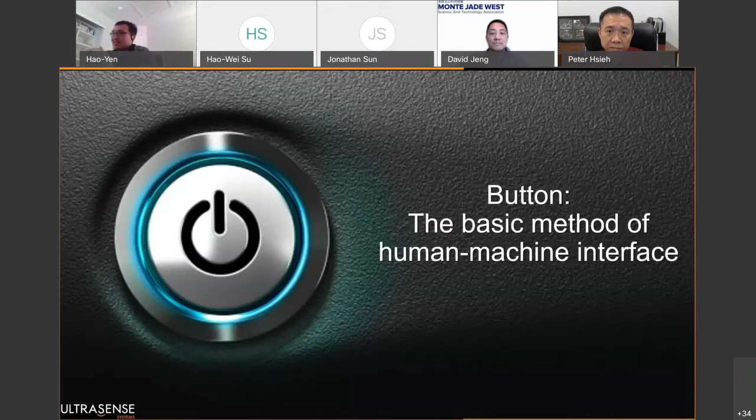Before that, it was an age of mostly BlackBerry-type traditional phones. People wanted to add more functionality into it, more human-machine interface. Literally, people tried to cram the whole keyboard onto the phone, making the whole phone so bulky - until the iPhone came and introduced touch panel technology.

This is, of course, something we're working on at the very front line of technology development. People are not satisfied with just replacing all the buttons with a touch panel. They also want to remove the side buttons on the phone - the volume up, down key, and the mute key.

Why is that? When we interact with lots of companies, especially mobile companies, there's a very interesting perspective - the most important thing for them in replacing the mechanical button is beauty. They want to make their phone look different from others. They want to make the phone completely symmetric, so the appearance of the phone is the thing they care about the most.

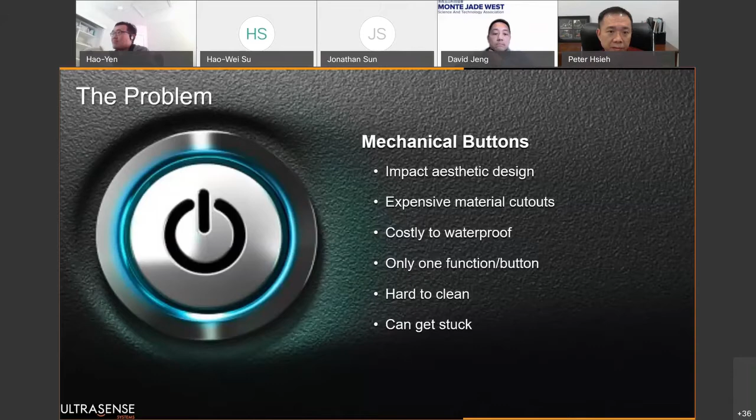We place this chip on the back side of any material, and it can virtually penetrate to almost any thickness in the current design for any kind of consumer electronics. Then it will translate the top side of the stack into a user interface. I emphasize user interface because it's not only a mechanical button - it can provide a lot more functions than that.

Here's a brief company overview before I jump into the technology perspective. Our company was founded in April 2018. A little bit of story here.

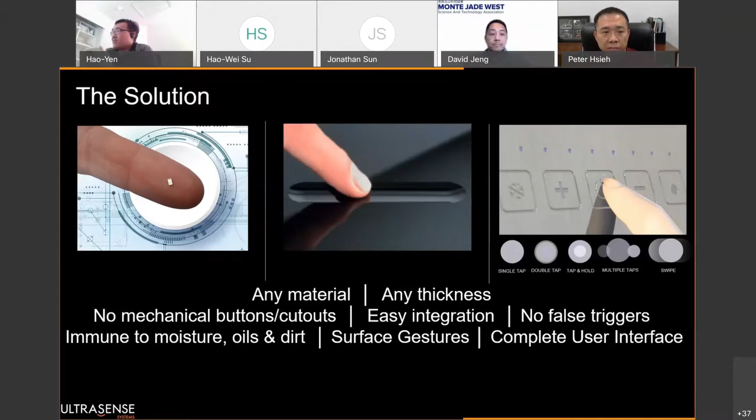My former employer was a company called InvenSense, which was about a 1,000 people company. They focused on making MEMS sensors, especially the gyroscope sensor. They used to be the world's largest gyroscope supplier when they had the POs from Apple. But in the industry, I think lots of people call them 'poison apple', because if they have you, then you go IPO; if they abandon you, then you crash.

But InvenSense wasn't that bad. It was actually pretty successful, went through IPO, and the company grew pretty large. But later on in 2017, it got acquired by a company called TDK, which is a Japanese company. By the time I was at InvenSense, our CEO and our previous management team jumped out.

They also grabbed me, and then built this company based on some of the research I did back in UC Berkeley. Our office is in San Jose as headquarters, and we do have sites in Shanghai, Seoul, and Hsinchu. Hsinchu is actually the largest site, and handles almost all the production facility and production issues.

Our investors - I especially want to emphasize our company is backed by a good amount of investors, including Bosch and Sony, which are the two most shining names. We also have lots of patents going on. You can search our company's name and already find 4 issued US patents, with more to come.

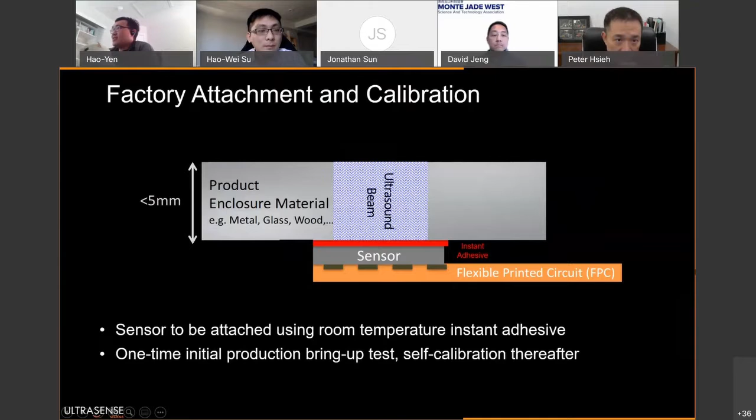So with that, our sensor is now being used in a variety of domains. For mobile, we mainly use it to replace the volume up-down key. There's a customer working with us to implement a selfie button on the back side of the phone. And as gaming phones become more and more popular, people would like to implement two extra buttons on the side of the phone to mimic a joystick. These are the three directions customers in mobile are working on with us.

There are other, newer technologies using this as well. We are working with IoT and wearable customers, including smartwatches, wireless earbuds, and AR glasses. These solutions especially like our approach because the whole design needs to be really small, so they can't afford a big sensor. They need something tiny because space is very limited. But they still need some kind of human-machine interface to execute commands or interact with the device, and they don't even have space, like in AR glasses, for a mechanical button. That's the reason they come to talk to us.

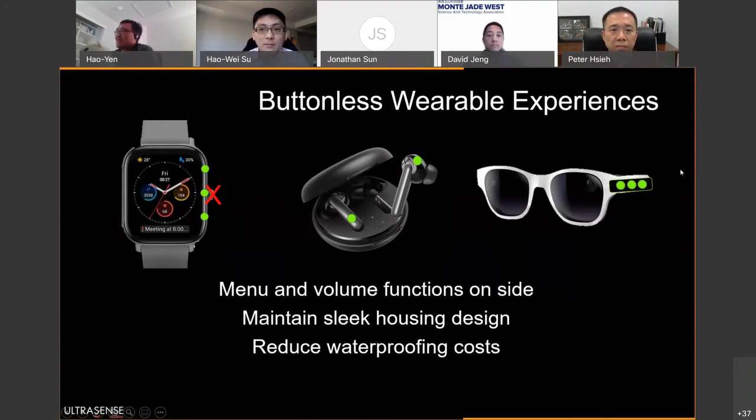On the appliance side, the story is quite different. The main reason they want to work with us is they want to make it completely waterproof, and also add features beyond a simple mechanical 0-1 press. They can also save a lot of cost by not cutting holes through stainless steel, and directly using our sensor as a touch interface.

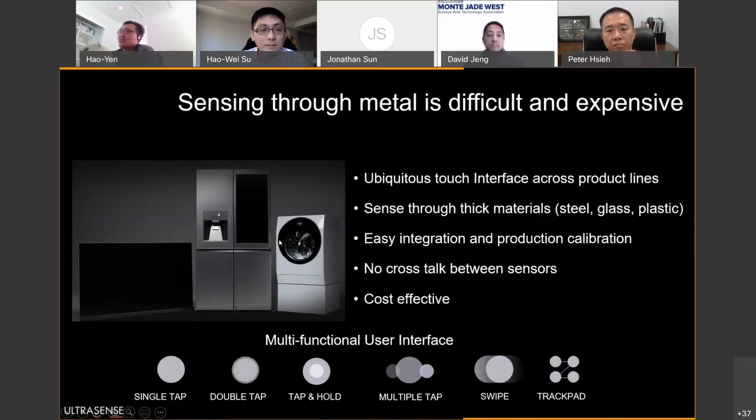With limited time, I'll show two more videos. This is wood. As I mentioned, ultrasound is not material-specific; you can literally penetrate through almost any material you can think of.

If you touch anywhere outside the material, it's not going to work. You need to touch the location where you laminate our sensor in order for it to trigger. So it's not something like a spring you just attach to the bottom side of the material. Otherwise, your whole material will trigger, and then it's not really categorized as a button. The button needs to trigger only the location when you press it.

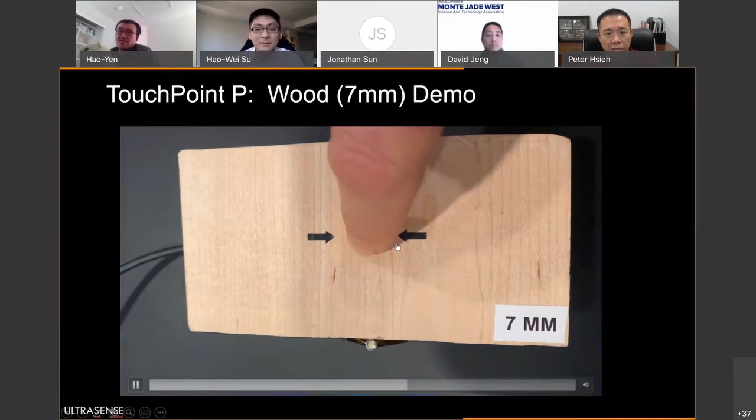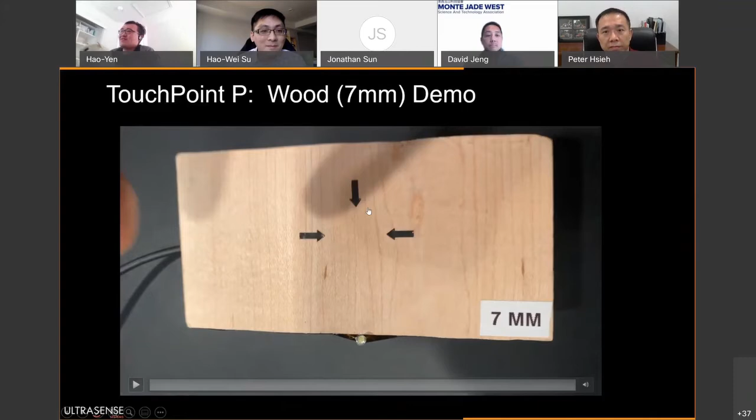I'll show one more video. This is kind of the final page, but this is just for fun. Nobody really needs this application, but here is a 2 centimeter aluminum box. Same story, it's not a spring under the metal box. You need to press the button location in order to make it work. This video shows there is almost no limit to our technology in terms of material thickness and material properties.

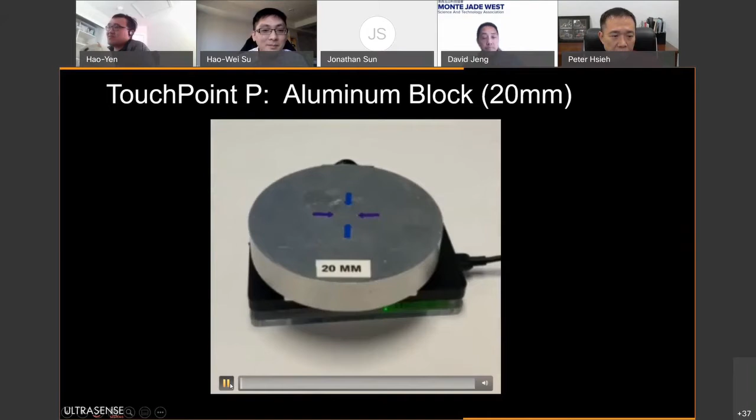Awesome, Hsieh, thank you. This is awesome technology. I really wish I don't need to clean the keyboard anymore in the future. Yeah, that comment really comes from one of our customers.

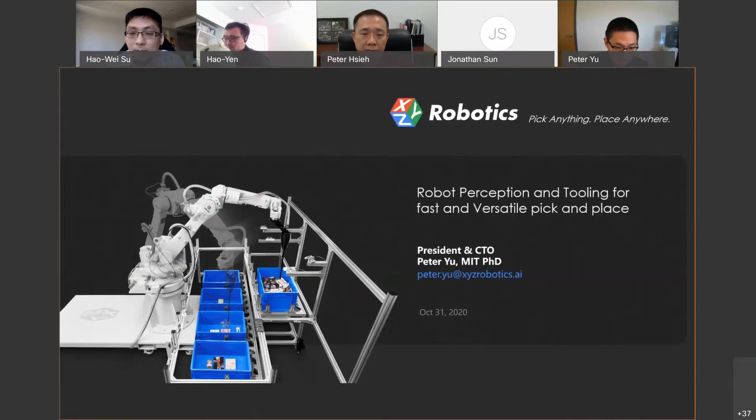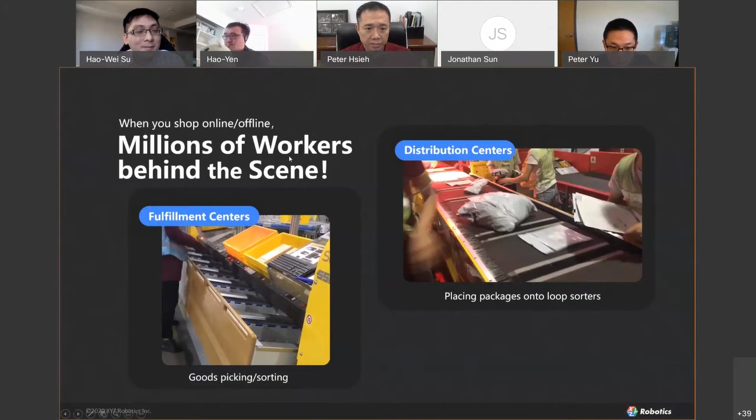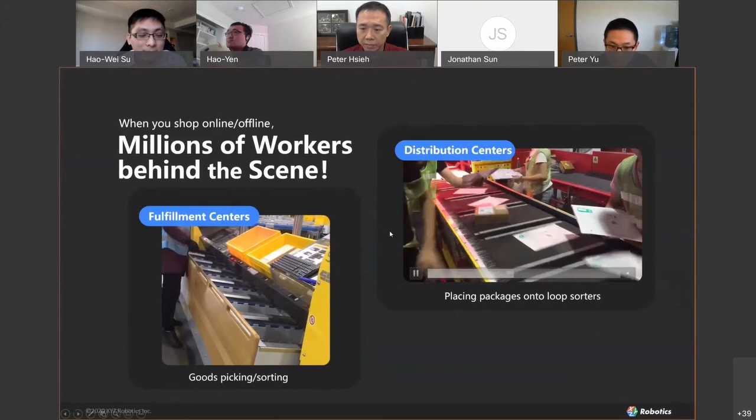or sending packages around. After you do online shopping, there are millions of workers behind the scenes to get your goods picked in an Amazon warehouse, or after they pick your item and ship it, it goes to a distribution center like UPS or FedEx. They have lots of people doing this conveyor belt induction. So the challenges in logistics are rising labor costs and high turnover rate. Humans will make mistakes because sometimes it's a sorting process, and after 8 hours of standing work, they get very tired.

So that's what we are trying to do, trying to automate the pick and place. In logistics, it's called piece picking, picking things one by one.

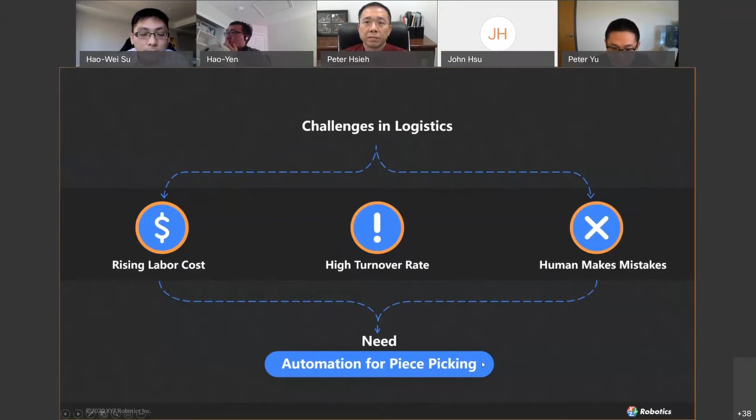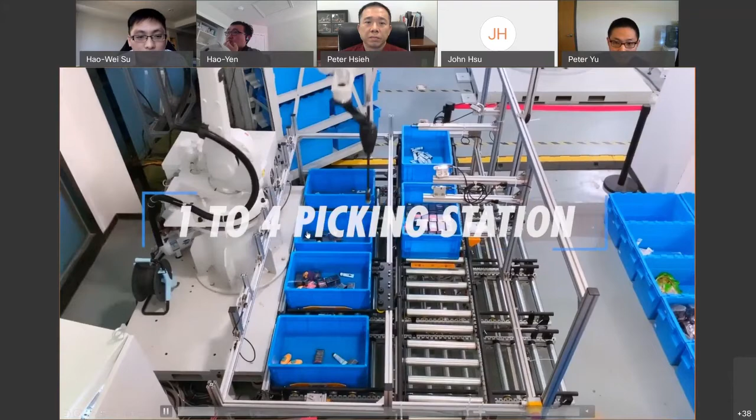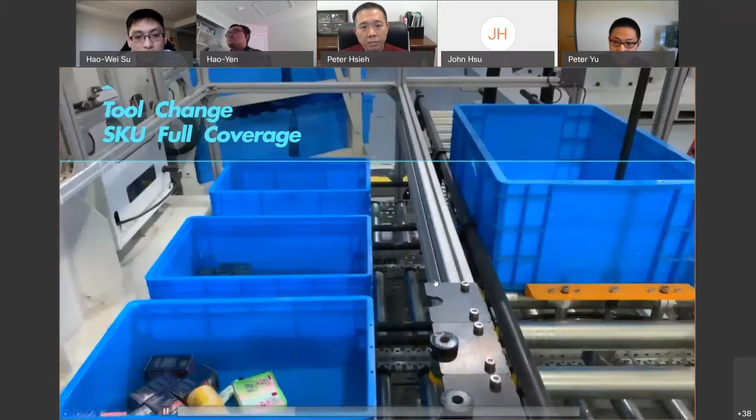So here I'll show you a video of how our system works. This is called 1 to 4, from 1 tote to 4 totes. Usually this tote coming in has homogeneous items, like the same item. Here we have a tool change that can swap to different sizes of suction cups, which can help pick up many different kinds of items, including some challenging reflective items. Here it shows the toppling, and here it shows the gentle placing.

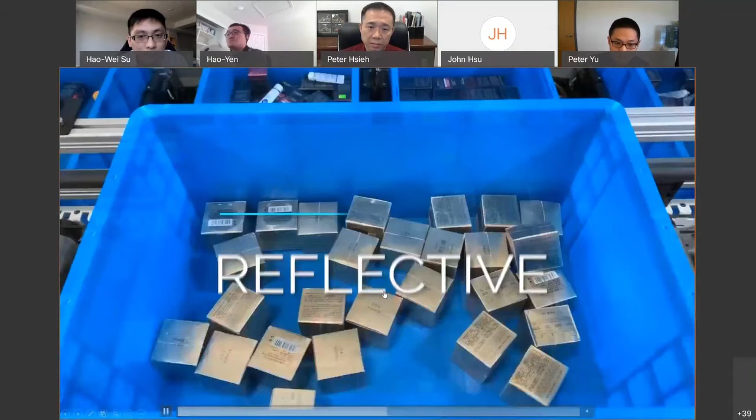Okay, I hope this gives you a quick overview of what we are doing. So there are some key metrics for automating piece picking.

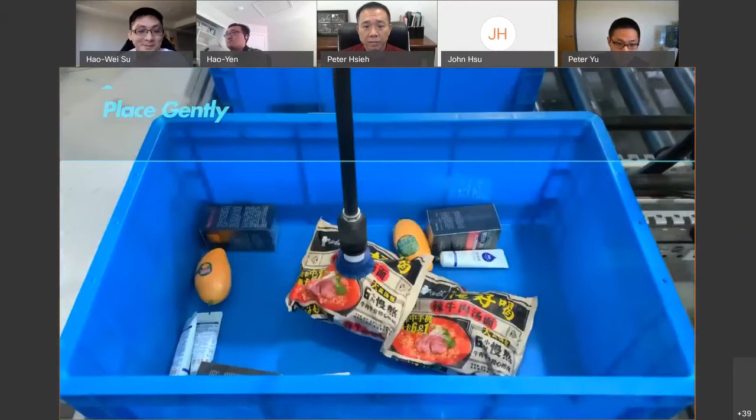There's rate, how fast you can do it. Usually the customer will like the robot to perform as fast as a human, or even exceed human performance. And range is like the different weight, different size, and different material of the item that the robot needs to be picked up and placed.

And reliability—unlike lab work, which only does it for demo or for video shooting, here we really want the robot to work like 24/7 without much human intervention. And there is cost, because it's kind of like replacing labor, and you want a good price, because the robot system is also kind of expensive, so we need to reduce the cost so that it makes sense to replace the human.

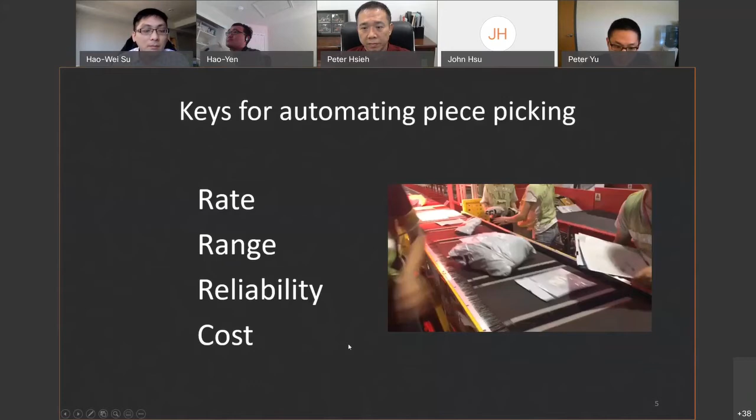So our solution has one key thing called our 3D AI vision processor, which is kind of the eyes of the robot. And then there's the hand of the robot, which is the XYZ tooling component. By combining these, we form turnkey solutions.

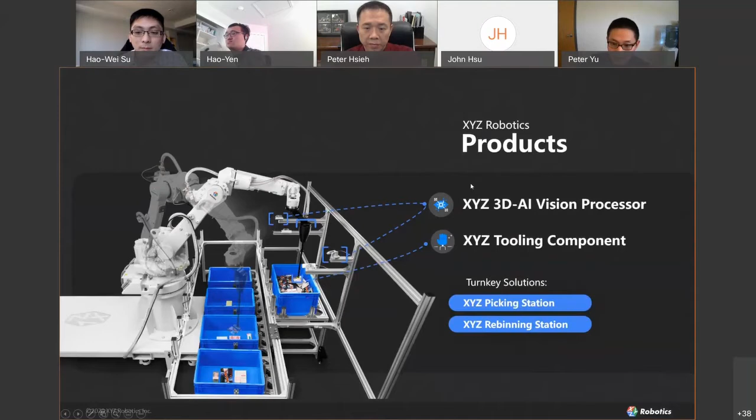And it's pretty fast, 0.1 seconds for VGA mode. This is important for achieving the rate that the customer wants.

So we can pick a very wide variety of items. Again, we don't train on individual items—we let humans instill the picking capability into the robot by doing labeling and training, so that in the end the robot knows how to pick it up and humans don't need to do it.

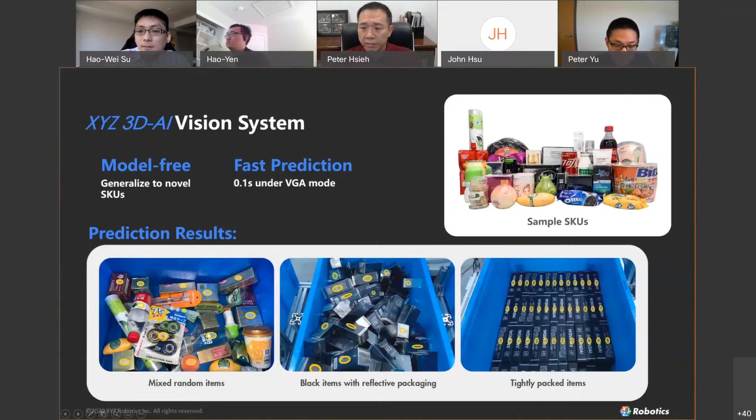On the other hand is the tooling, meaning what is attached to the robot. This is our typical end of arm tooling attached to the robot. Here's a key feature: compliance. When it hits the item, it will automatically retract passively, so it won't collide with the item or damage it.

And then there's a tool changer, something like this that helps you swap between different suction cups or even a gripper. I'll claim that as far as we know, we have the fastest tool changer in the world—it's 0.5 seconds per change.

Here I'd like to show you a video of what's going on for the tool changing. Here is the tool changing dock, with the suction cup and the gripper. Typically we like to use suction cups, but there are items, say thin or mesh items, which really need the gripper to grab the item.

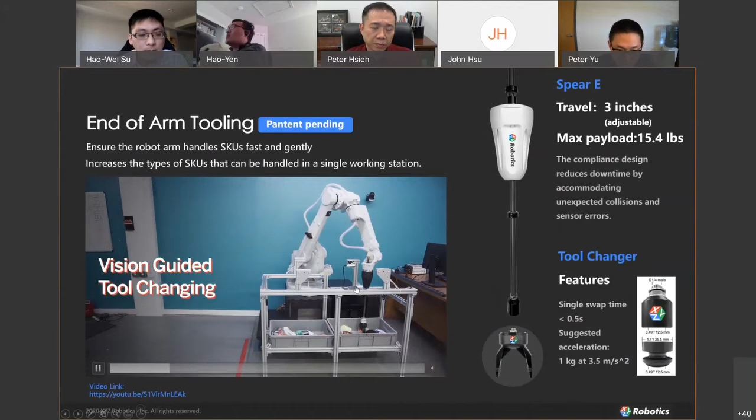It's very low profile, not big, so it can get into a clutter scenario pretty easily. Something like this bath sponge or this tool needs to use the gripper.

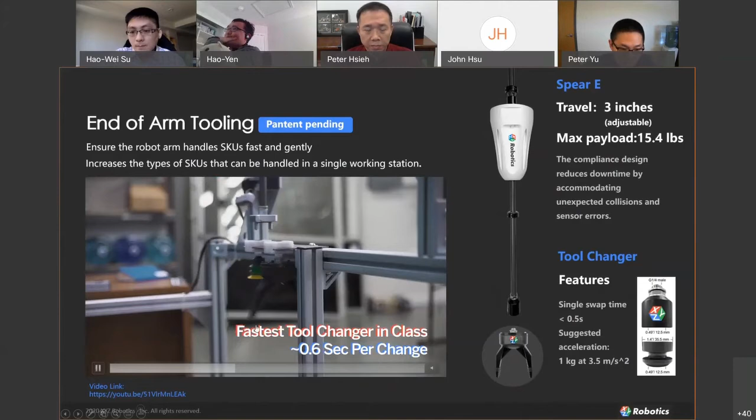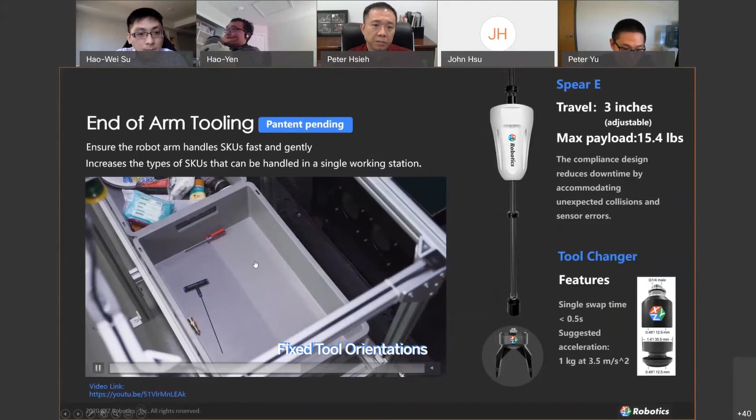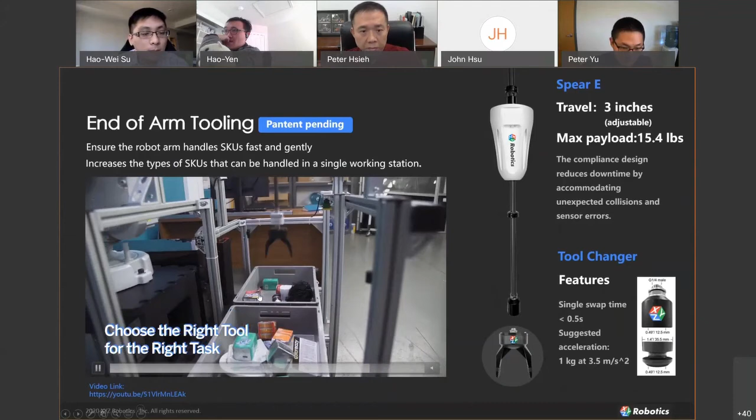So what we want to say is for the robot to increase its range, it really needs to use the right tool for the right job. We have the mechanical capability here, and on the software AI side, we also need to give the robot the intelligence of knowing which object should use which tool.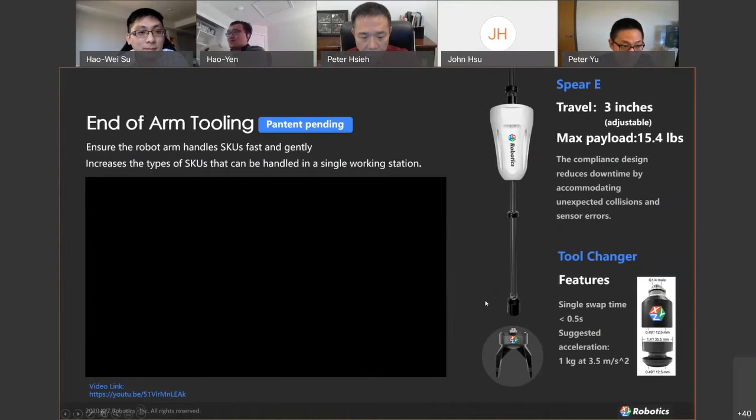Here is a close look at a gripper that we developed in-house. It's a soft gripper, and it helps with picking items without damaging them. Sometimes there will be an unexpected collision, and the soft gripper is good at adapting to the scenario.

The design of it is driven by vacuum, so it can easily swap between the vacuum and the suction cup, just using the same tubing that we have.

Here I'll show you many other scenarios that we have deployed. The first one is palletizing and depalletizing, which is a larger scale, and it's a real hard need because usually these boxes are pretty heavy.

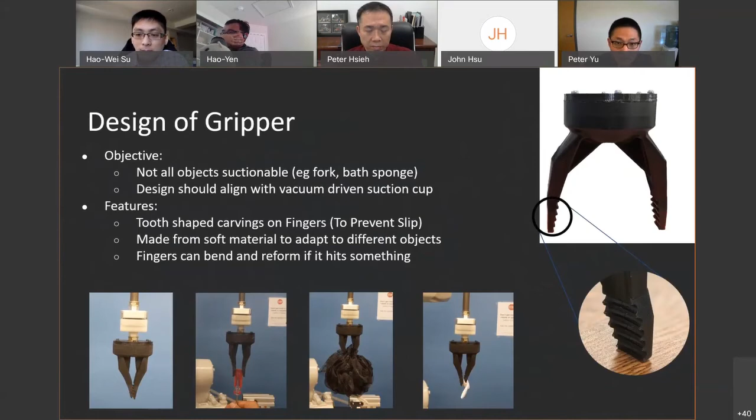The second one is picking Legos. Lego is pretty challenging to pick because it's an irregular shape, but we were able to develop our tooling and vision system to pick it.

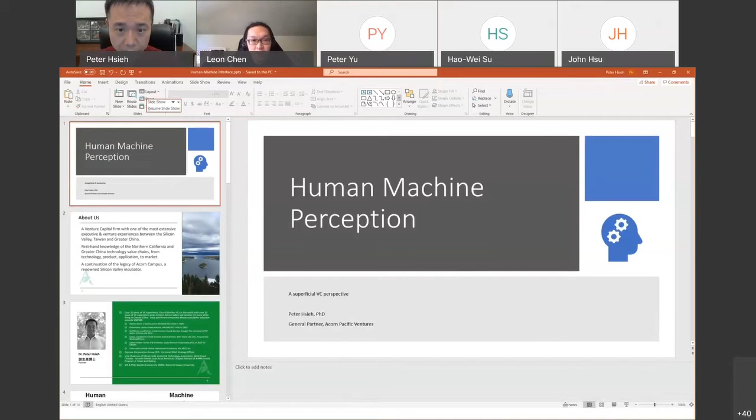Okay, yes, great. So thank you, everyone. I just want to say how grateful and honored I am to be able to speak at this venue. I am actually a son-in-law of the New Haven area, because my wife, who is also Taiwanese, got her master's degree from University of New Haven in healthcare management. So it's a wonderful experience to come back here, and I miss all the lobsters I can have over there.

Today's topic took me a while to understand, and I decided to approach it from a different angle. The topic is merging human-machine perception, rather than merging human-machine interface. When I was writing the speech yesterday, I found the human-machine interface market worldwide is currently around $6 billion, growing only about 8% to 10% a year over the next several years. So from a VC's perspective, especially with so many people tackling human-machine interface, $5 to $6 billion with so many startup companies is actually a little too small.

So I looked at the topic again and found out the event host here in New England decided to call the topic merging human-machine perception. So perception is definitely different from interface. I did some further research and found out this.

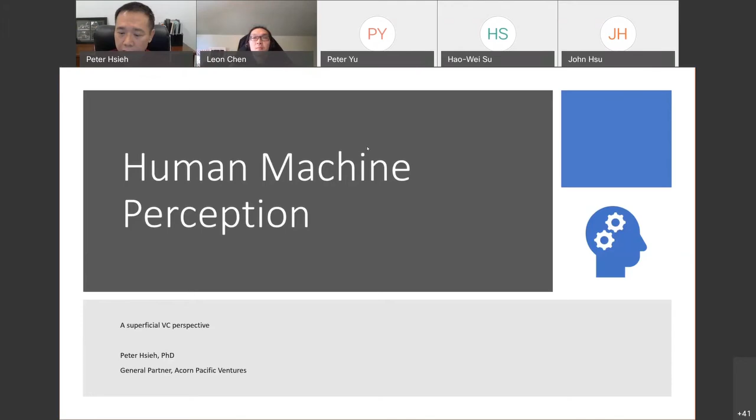A brief about Acorn Pacific: we are a venture capital firm with a lot of executive and venture capital experience, both here in Silicon Valley, Taiwan, and Greater China. We started around 1999 with a bunch of very successful Taiwanese entrepreneurs here in Silicon Valley. Companies they have either founded or invested in, cumulatively, exceed about $200 billion. So it's quite a legacy from the old Acorn campus area.

One thing I think in the East Coast you also have is Ranch 99, which was also created by several of the founders of Acorn previously.

Acorn Pacific continues the legacy of Acorn Campus, so we're the new generation. Myself, our chairman has already introduced myself, so I'll skip this slide.

This talks a little bit about how people see it, and this is a very old slide that you can see everywhere. To the left is human, to the right is machine. And the horizontal arrows in between is the interaction and the interface.

But what I think the topic today is related to perception, which is on the human side on the upper left corner, cognition, how people perceive and understand. On the right-hand side is how the machine utilizes the data to understand. On the upper right side is called processing.

Interface is easier to be quantified, but cognition and processing is a lot of gray zone. For example, if a girl approaches one of you, or a boy approaches you for your telephone number, how would you perceive that? Is it that he is interested in asking you out for a date, or he mainly wants to have a professional acquaintance, or he just wants to add you on his Rolodex? These perceptions are very, very different, and people can understand, and machine can also understand it differently.

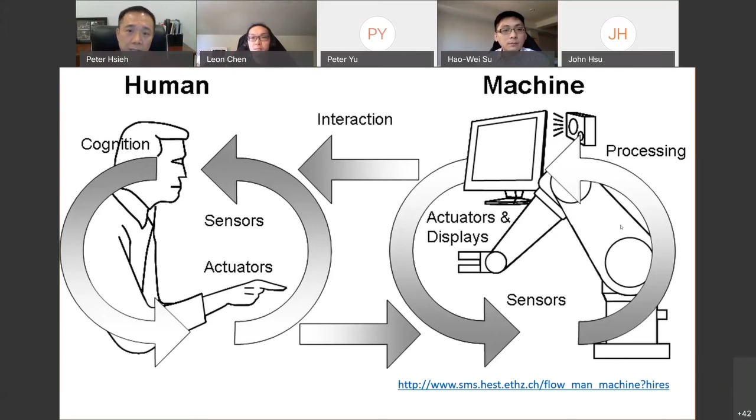Using Chinese perspective, when we say 五官, it's 眼耳口鼻心, and plus there's also 皮膚, which is haptic response. Translate that in English, it becomes eye, ear, mouth, nose, mind, and touch. If you look at the right-hand side, it actually corresponds more or less to optical, acoustic, bionic, tactile, and motion.

Now, motion is related to touch. We previously had a company who was presenting a pick and place type of robotics with very advanced grips. But in a lot of factory automation cases, you do not want your robotics arm to swing too fast because there may be operators nearby. So having some kind of tactile feeling is also important. Knowing that there are something nearby and the machine, the robotic arm, should stop is also important.

On the actuator side, these are interfaces I'm talking about. We have fingers, vocal cord, you speak to people, you sing. You also have limbs, which is your robotics arm, and others. Maybe it's your tongue, your smell, and everything else. So 眼耳口鼻心 plus 皮肤, that actually stands for a lot of the human-machine interface we want to talk about.

But the most important thing and difficult thing is the machine processing and human cognition. Now, I say this topic is a very superficial venture capitalist speech because...

We want to talk about processing, but your speaker today here is a VC who has not been an engineer for over 20 years. And also the computer language I'm capable of writing is only Fortran 77, not even C++ or whatever. So bear with me, it's very, very ancient feeling here. But I want to share with you why I care, less at the end of this talk, because...

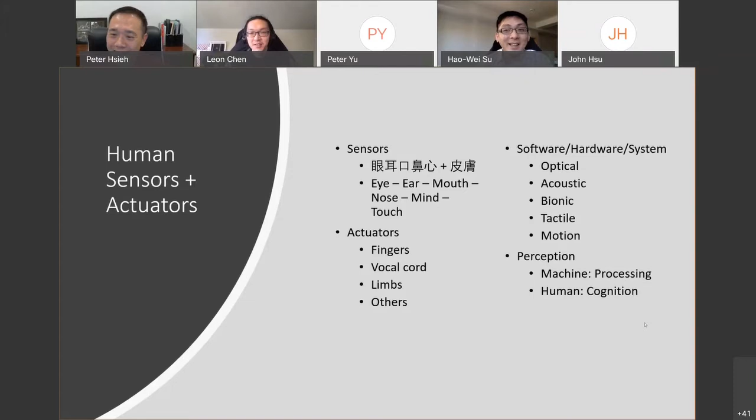If you enter a board meeting in any startups in Silicon Valley, to be honest, the biggest topic is not technology of the company. The biggest topic is the business of the company. So now, I understand from the pre-meeting preparation that audiences of this event is not only engineers, also there may be some architects, some economists, some accountants, and other people like myself who know nothing.

So briefly, artificial intelligence is the main set. A subset of that is machine learning, and the smaller set of that is deep learning. Very, very briefly, the concept is AI is the broad discipline of creating intelligent machines by using logic.

Machine learning refers to systems that can learn from past experience or past data that has already been collected. And deep learning refers to systems that learn from experience on large data sets, also able to collect data from sensors. So we have these human-machine interfaces that's collecting data. Therefore, if you have a deep learning model, it continuously learns by being provided with more data. Therefore, when we talk about all of these things, I want to focus on what deep learning is related to.